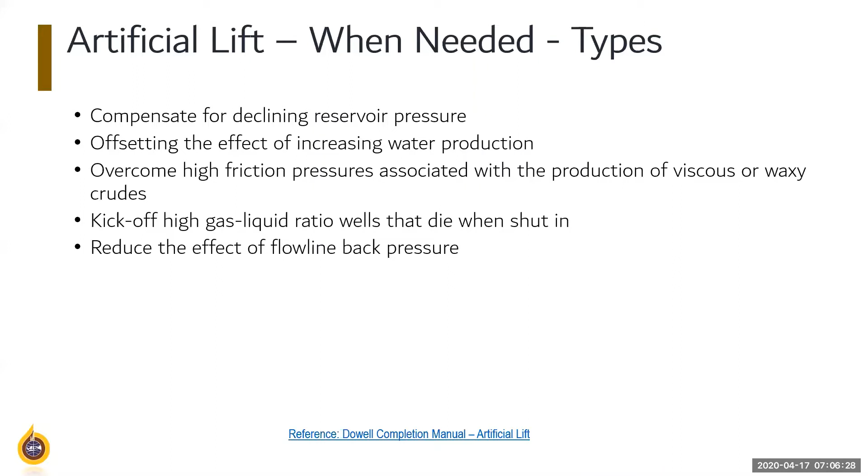The last reason is to reduce the effect of the flow line back pressure - and it's not only the flow line. If you have a surface facility operating at high pressure, it will give a back pressure to your wellhead, and at the end, the wellhead will give a back pressure to the reservoir that causes the fluids to not flow to the surface.

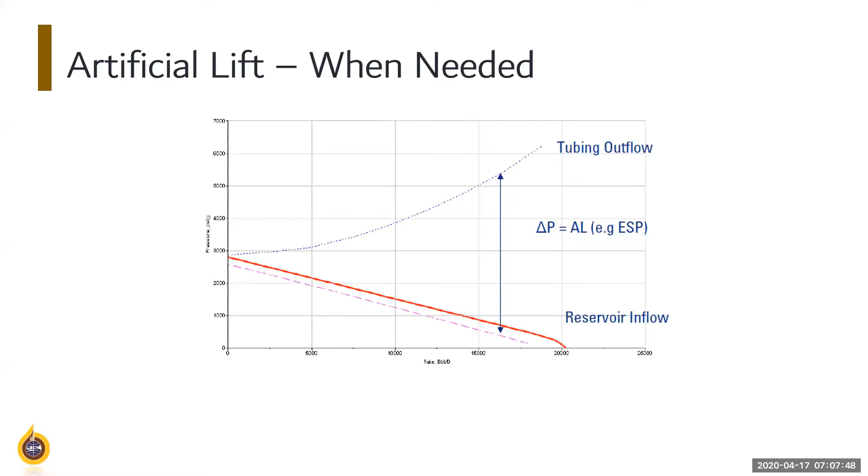In the ideal condition, the blue line has to intercept with the red line. In this picture, the blue line is not intercepting with the red line, which means the well is not flowing. That means the well will need some help - that's why we put in an artificial lift.

We know there are lots of types of artificial lift in the world. This data is from 2 years ago, but rod pump is dominating the usage of artificial lift worldwide. The reason is most wells that need artificial lift are old wells - all these marginal fields will need artificial lift. When we talk about old wells in marginal fields, production is relatively not that high, and rod pumps are very good for low production and onshore, and cheap in terms of OPEX.

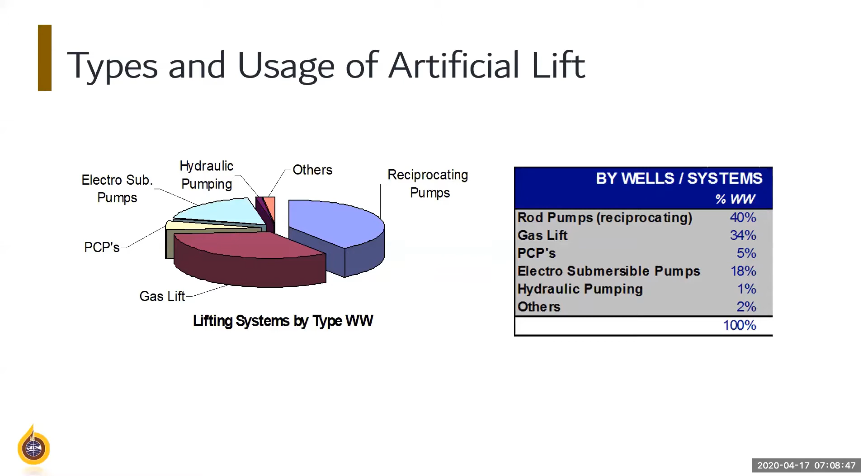The second place is occupied by gas lift, and then continuing with ESP. So in today's presentation, I'm focusing only on gas lift and ESP.

Let's start with ESP - electric submersible pump. It was founded the first time almost a century ago, in the 1920s, in Russia. So you might hear ESP called a Reda pump - Reda is the first company, actually the name of the person who invented the ESP. The function of ESP is to bring fluids from the reservoir to the surface.

On the right-hand side, you can see the configuration of an ESP. From the bottom, this is your perforation column, your perforation depth, and from bottom to top, this is a standard configuration of an ESP. We will start with the downhole monitoring tools.

This is an optional equipment, but it's a very good equipment to have because the downhole monitoring tools will give you data on your pressure, temperature, and the condition of the motor itself.

Above the downhole monitoring tools, we have the motor. Above the motor, we have the protector, continue with the intake, and the pump. And we also have power cables that supply the power from the surface up to our motor.

ESP have a very range variety of size, capacity, horsepower, and voltage. So it's all depending on what you want and what the well's capability to produce.

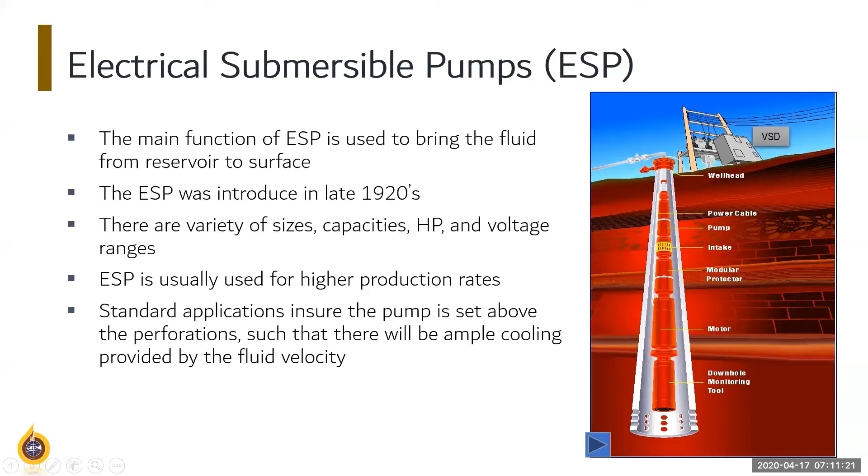I'm trying to go one by one about the ESP component. The first component is the pump. The ESP pump is a multi-stage pump. One stage consists of an impeller and a diffuser. So the pumps are stacked on top of each other.

It's like when you order a pancake in a restaurant, you have a few layers of pancake. So the ESP pump is like that. As you can see here, this is all your pancakes, lots of pancakes stacking on each other. All of these stages move together one by one, so when one is moving, everything is moving together.

ESP is bad with high gas, sand production, and high temperature. Why? Gas creates a cavity. Like any other pump, when you have gas, you will create a cavity in the pump. Other than that, it will create a symptom called gas lock.

What does gas lock mean? It means that when you have gas, and if you can see in the slide, the pancake has a small space, and if you have one gas bubble or one particle of sand stuck in one of the stages, that specific stage will be stuck. And when one stage is stuck, the whole stack cannot be moved. It will lead to a pump failure.

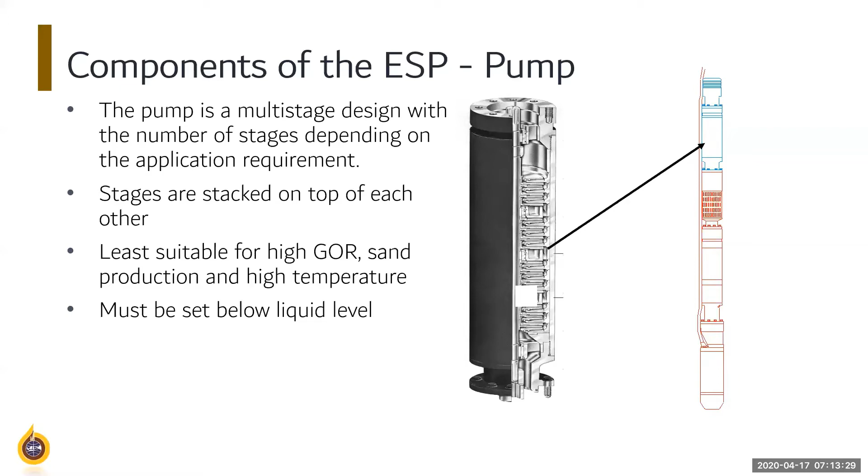This is a typical pump performance curve. Every single ESP pump must have this. So the yellow area is the optimum range. This is the best area for the pump to be working.

This pump curve is for 1 stage. We never put an ESP with 1 stage. We always put ESP with 20 stages, 50 stages, sometimes even hundreds of stages. But for this example, you can see that the best efficient rate is 2,581, which is here.

With this 2,581, every single stage will need a head of 46.75 feet. And it will require 1.31 horsepower per stage. So if you have 100 stages, we have to multiply this 1.31 with the number of stages.

The second component is the protector. If you remember the configuration in the first slide about ESP, it's located above the motor. The primary function of the protector is first to couple the motor to the pump. It's a connection, a bridge from motor to the pump itself. The second reason is to carry the thrust load from the pump.

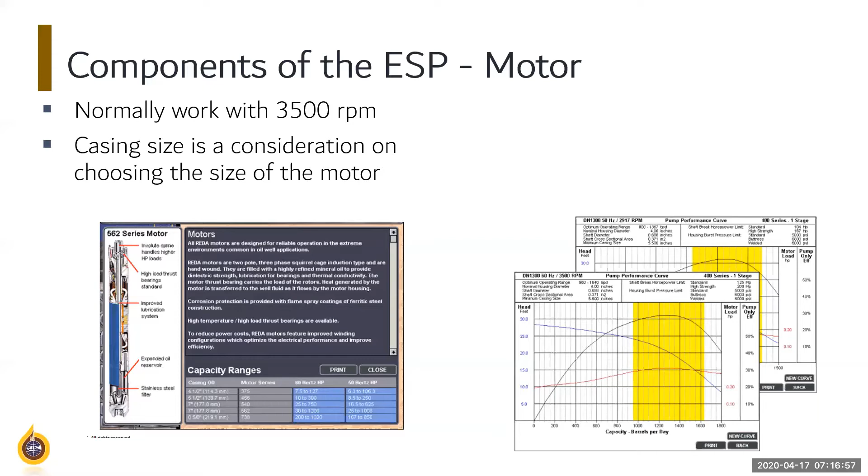Another major component is the power cable. Why is it important? Because the power cable is the one that supplies power from the surface to the motor itself. The power cable is actually the most expensive part of an ESP. The power cable is made with copper as the conductor wires.

As you can see here, the cable will be clamped from the surface via the tubing through the motor during the installation of an ESP. This is one example of a basic standard application for connecting the cable. This is the top of the motor, and we connect the ESP cable here, and this cable goes from the top of the motor up to the surface, as I mentioned before. This is the copper wire that will be connected through the pot head of the motor itself.

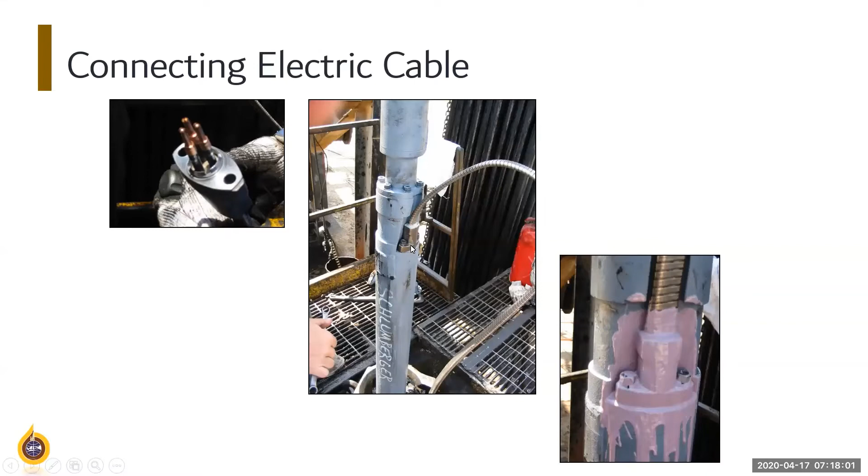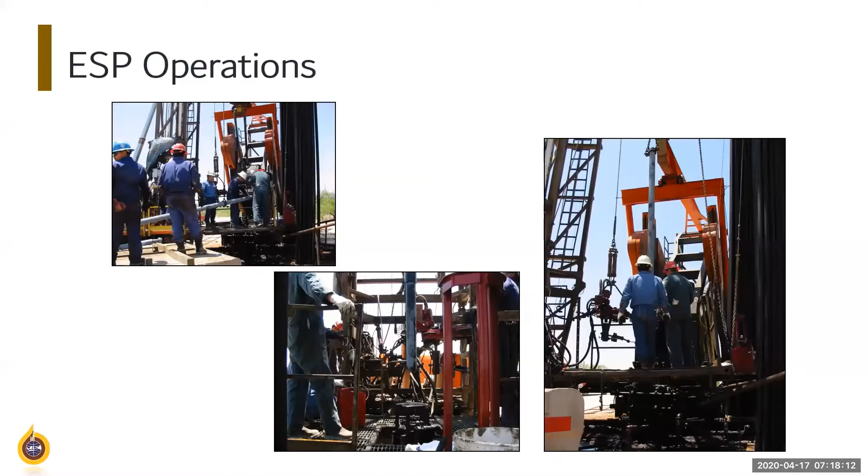This is a typical standard ESP application with a workover rig onshore. The cable, as I mentioned, is clamped through the tubing, so from the ESP assembly up to the tubing through the wellhead.

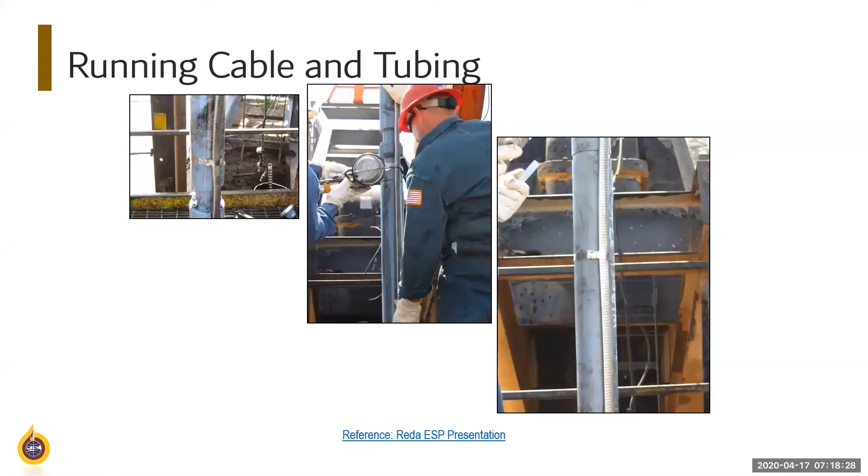So what are the advantages and disadvantages of an ESP? The good thing about ESP is it can operate reliably in deviated wells, but bear in mind we also have limitations on how deviated the well can be where we install the ESP. ESP can be used effectively offshore. You might be thinking, where does the power come from for the ESP offshore? In offshore applications, most ESPs are supported by a generator, so we bring a generator to the platform and it provides the power. In onshore applications, we usually take power from the grid line, but in some countries we also still use a generator.

Another advantage is ESP can operate under extreme conditions, and it can also be utilized in sour wells. Sour wells mean H2S and CO2. Bear in mind, if operating in sour wells, we will have to modify some parts of the ESP to meet this requirement.

And what are the disadvantages? You need high power to operate this ESP - thousands of volts. So if you don't have enough power, you cannot do ESP. Remember that power is related to cost, so the higher the power, the higher your OPEX on operating this ESP will be.

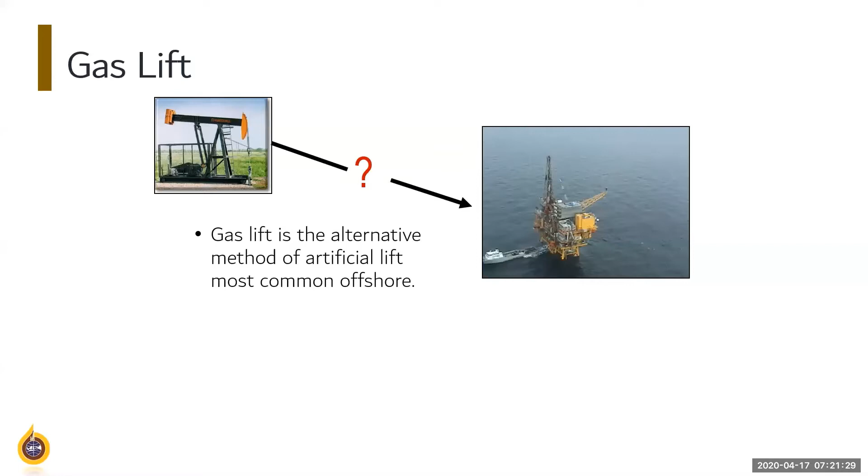Then people will say, why not get an ESP? ESP is expensive and gas lift is cheaper. As you may be aware, any operation offshore will be double or triple that of onshore in every aspect. So the way gas lift works is it uses high pressure gas, and usually this gas comes from your reservoir.

So from the reservoir, the gas will be dehydrated, treated, and then re-injected back. But not as a gas injection, but as a gas lift. So you inject the gas lift from the surface.

I'll use these pictures on the right. You inject the gas from the wellhead to the surface through the casing, and then we try to inject as deep as possible in the wellbore.

The reason is if you inject as deep as possible in the wellbore, it means the column of fluid that we want to be lightened is going to be higher.

And the way we inject it is through the side pocket mandrel. The one that has the small elbow is the side pocket mandrel, and inside it we put a valve, a gas lift valve.

The concept of gas lift is to lighten the hydrostatic column. ESP is different. ESP is playing with the drawdown of the reservoir.

The advantages of gas lift is that it's considered cheaper because you use the gas or the energy available from the reservoir itself. Gas lift also covers a wide variety of flow rates, but it's not going to be as high as an ESP.

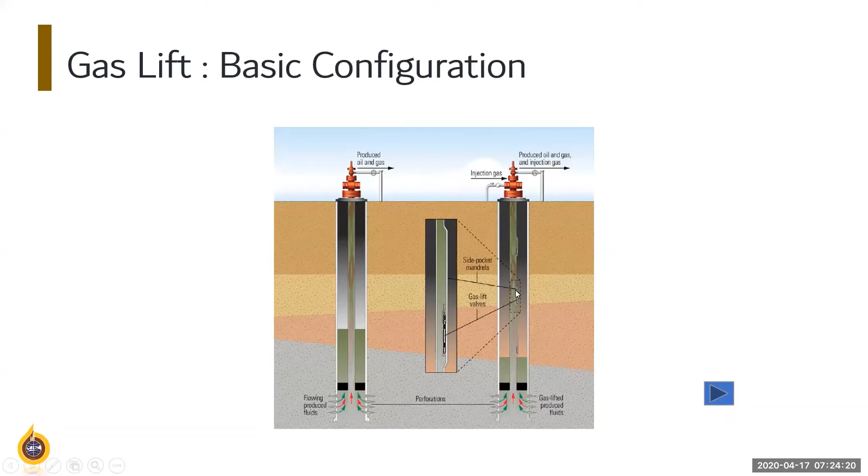So let's talk about the gas lift components. First is the side pocket mandrel. It's part of the tubing string, and you install it together when you do your initial completion.

The side pocket mandrel will have the same size, especially in this part, as your tubing. So if you're running 2 7/8 tubing, your side pocket mandrel will have to be a 2 7/8-inch mandrel.

It has an oval cross section on this side. When we do an initial completion installation, the mandrel will be run with a dummy valve just to close the hole.

So we put a dummy valve first, and then after the decision is made to run gas lift, we retrieve the dummy valve with slick line and install the real valve.

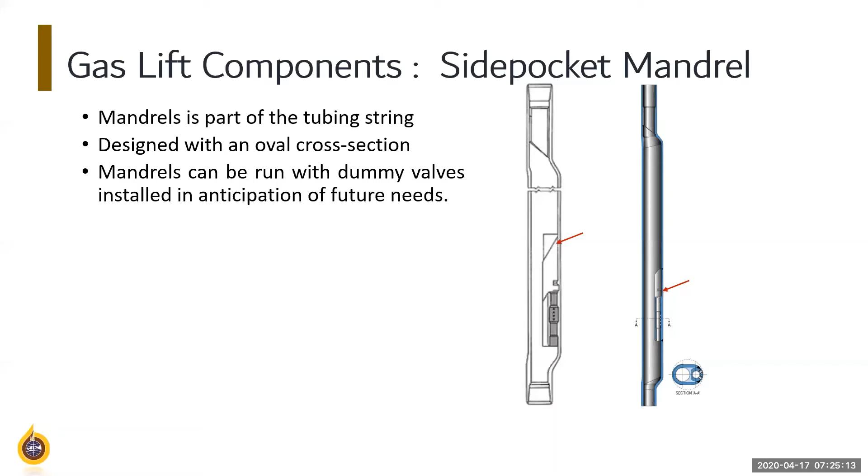The second gas lift component is the valve. We have two types of valve: one is the injection valve, and the second one is the unloading valve.

The injection valve is sometimes called the orifice valve. It's the one we install the deepest, because the orifice valve, or injection valve, is the one that is always injecting every time.

How we install it is the same, using slick line, and it's not pressure regulated.

Instead, the orifice valve has a specific opening size. You can go from 10/64, 12/64 up to 22/64 or 24/64 inch opening of the valve.

Unloading valve is a different story. With the unloading valve, the valve is only open when it's injecting during the unloading. So after the column of fluid is lightened, this unloading valve will be closed.

It's the same, slick line retrievable using kickover tools. And there are two types, because the unloading valve is a pressure-controlled opening, a one-way check valve, pressure controlled.

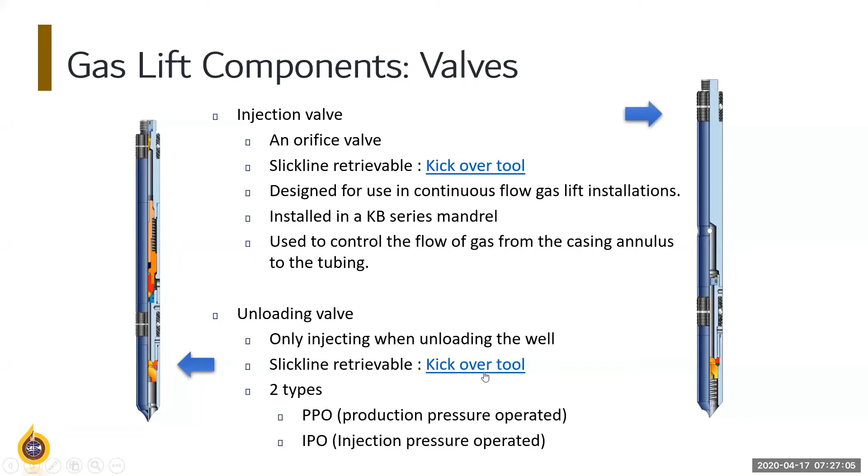This is a basic gas lift diagram. I'll try to explain it fast. So this, and this, is mandrel. You have three mandrels.

Usually what we do is put the orifice injection valve at the bottom one, and put the unloading valve in the first and second mandrel.

The way it works is you inject the gas through the annulus between the tubing and the casing. First, you inject to the first mandrel where you have the unloading valve. This unloading valve operates at a certain pressure.

Every single unloading valve has a PTRO, or pressure test rack opening. So when we inject here, the valve opens, it's injecting, and it's going to lighten the fluid column here.

After the fluid column in here becomes lighter, this valve, the unloading valve, will be closed. Once it's closed, the gas will go to the second mandrel and do the same repetition. Once the whole fluid column is lightened and all the unloading valves are already closed, then the injection valve will start injecting every single time.

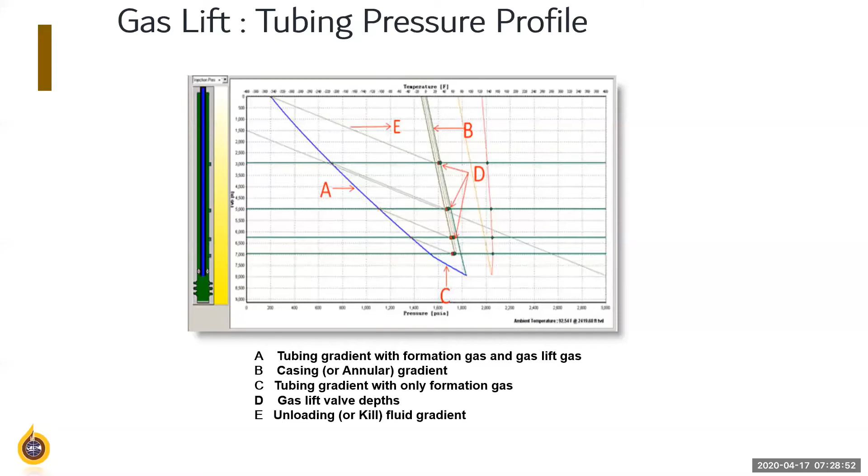So this is a normal basic gas lift design. You can do it manually using grid paper, or you can do it also with the software. Me, personally, I always do manual and software just for a cross-check.

And the reason is because when you have too much gas, you get higher pressure losses in the tubing. And instead of lifting all the liquid, you're just going to get all your gas producing, which is what we call a blowing gas well.

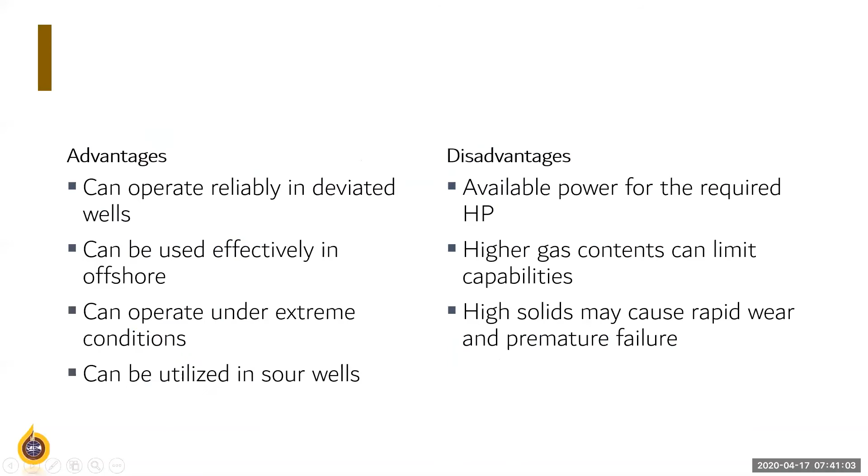Apakah sudah cukup jelas, Mas Ewi? Halo.

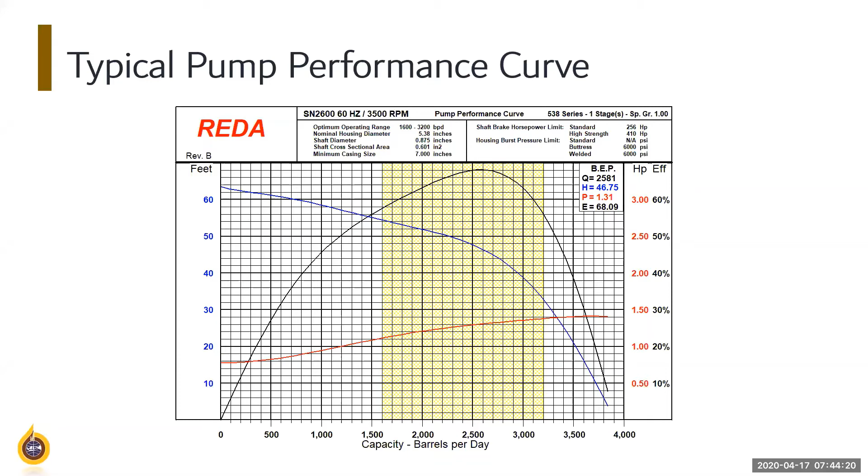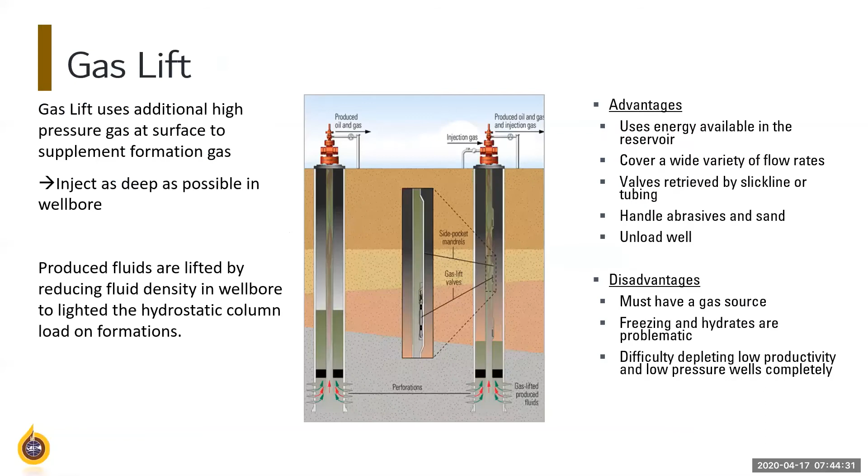If I go, I don't have it in my slide, but I will try to explain it with what I have. Mana dia? Let's see, okay, this one.

Unloading valve, you set the pressure, right? So you set the pressure of the unloading valve because, as I mentioned, unloading valve works with pressure opening. The difference between IPO and PPO depends on where the differential pressure is going to be. If it's PPO, controlled by tubing head pressure, the valve will open if there is a differential pressure between the tubing and the valve. While IPO, injection pressure operated, means the valve will open when there is a differential pressure between the casing head pressure and the valve itself.

So when do we use PPO and IPO? If you have a dual tubing, meaning two tubings in one casing, we will use PPO, because when you have one casing, you cannot control how many gas injections go to the long string and short string. I don't know if you can imagine it, but that's why we use PPO. While IPO is mostly used when you have a single tubing, like this picture. Single tubing is perfect to do IPO rather than PPO.

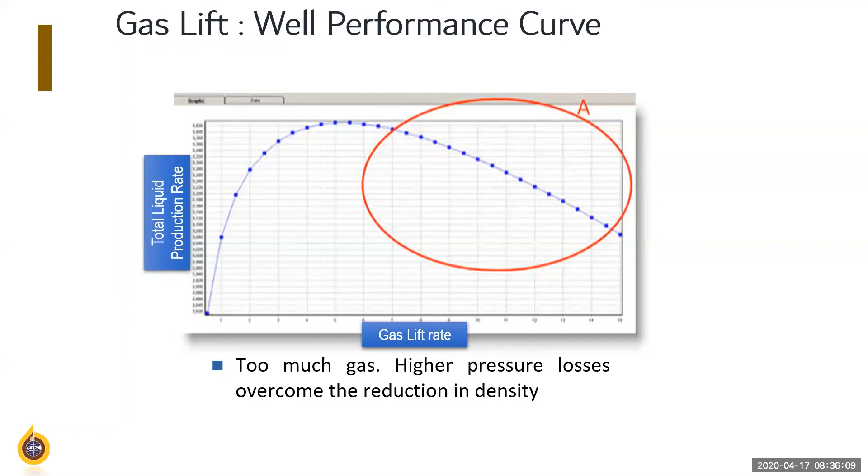Tadi tuh apa sih, kita masalah cased hole sama open hole. Kalau gas lift itu kan selalu ada top packer, jadi nggak ada masalah kalau di bawahnya cased hole atau open hole. Seperti yang tadi saya bilang, karena gas lift valve itu ada di dalam mandrel, jadi walaupun biasanya problem dari open hole itu solid production, kita akan sedikit ada solid production, tapi itu nggak akan jadi masalah untuk gas lift.

Kalau untuk ESP, it's a little bit tricky dengan open hole. Tapi yang biasa kita pakai, kita install semacam screen di bawah untuk memfilter solid sebelum masuk ke pump.

Oke, mungkin selebihnya Mas Thomas bisa keep in touch dengan Mbak Beryl untuk pertanyaan jawaban lebih detail lagi.

Halo, oke Pak, halo, iya Mbak Beryl. Sorry, saya Alamsyah. Oh Alamsyah ya, sorry mohon maaf. Mas Alamsyah nanti bisa kontak dengan Mbak Beryl, karena kita sudah di penghujung acara untuk hari ini. Namun kami akan berikan kesempatan untuk satu penanya yang paling terakhir. Silakan Mbak Beryl bisa dijawab langsung secara singkat. Silakan Mas Thomas.

Terima kasih. Nama saya Anggia Tri Thomas dari Universitas Trisakti, jurusan Teknik Perminyakan.

Halo, saya ingin nanya Mbak, syaratnya penggunaan gas lift itu apa ya? Setahu saya di Indonesia penggunaan yang paling banyak itu ESP dan SRP. Pada saat penggunaan ESP SRP, gasnya pada dibuang semua, di-flare-kan. Kenapa gas itu nggak digunakan pada penggunaan gas lift di Indonesia walaupun ada beberapa? Sekian itu aja pertanyaan saya.